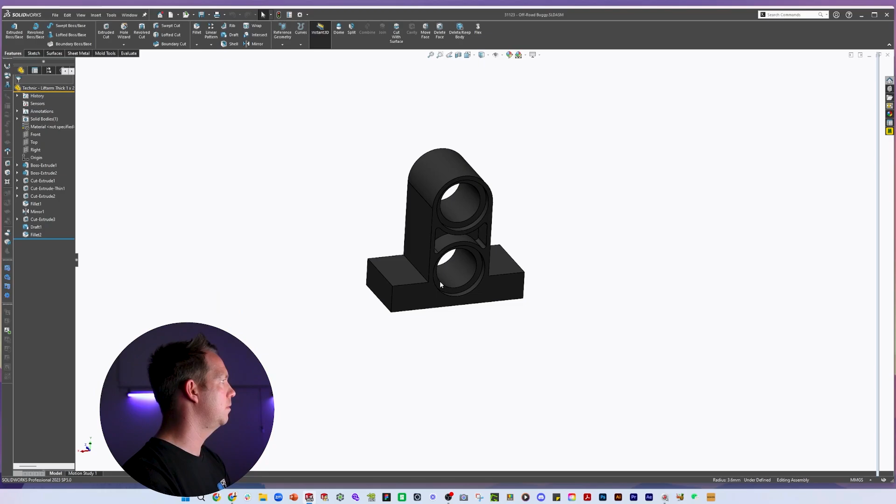What we'll have to do is change this boss extrude to be start sketch plane and go mid plane 7.8. And let's try this again. Not to great success, but I think we can recover what we've got here.

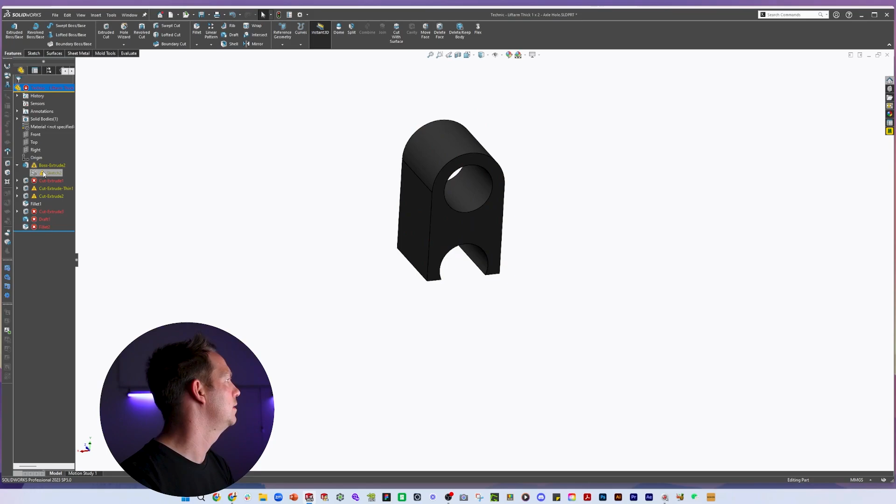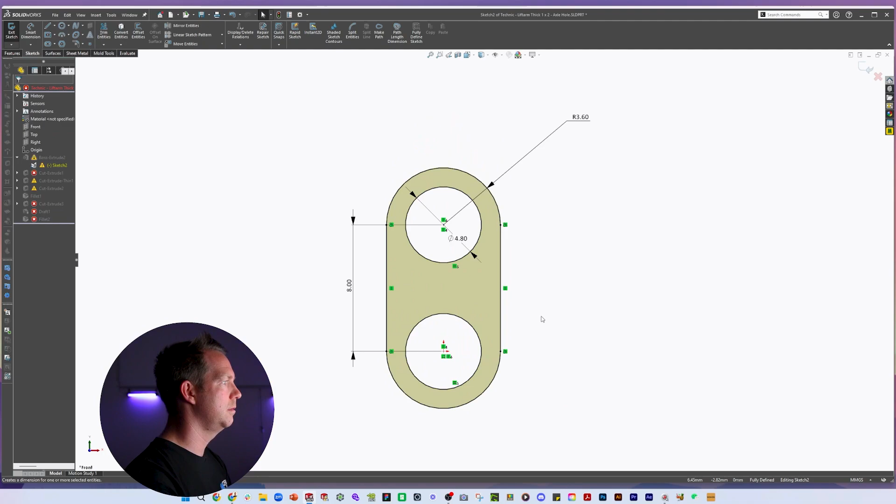We will do that by extending this bit out, removing this, removing these, making this point tangent, this point tangent, this center point coincident, and then changing the height by making this hole here on the origin. Let's see if it's actually got a size of 15.2. It does. Nice. So we don't need to change anything there.

Now I can accept, and then I can see that there's some other next parts that have had issues. One of them is this cut extrude, but we no longer need that separate cut, so we'll just remove that. And then we're up to this cut extrude thin, which was just missing a face.

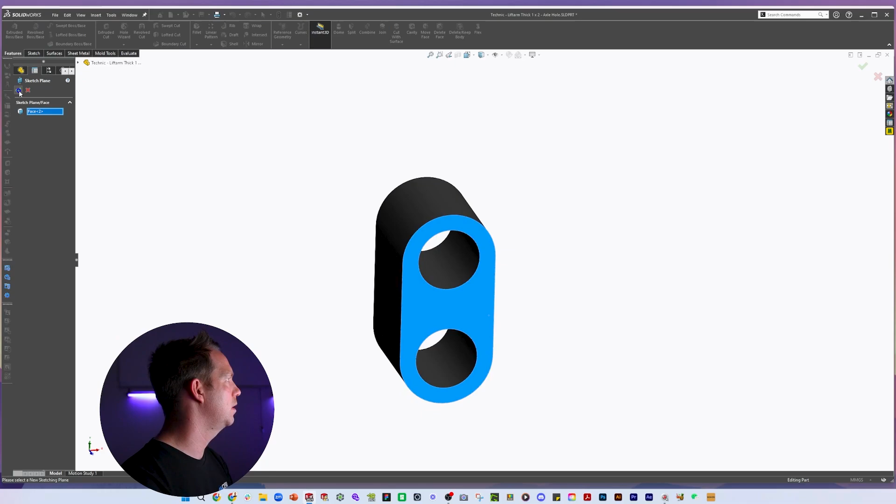However, this part now changes to a circle and, what's it going to call, an axle hole. Right, so we want to go back to the original sketch and we want to change that circle hole to an axle hole.

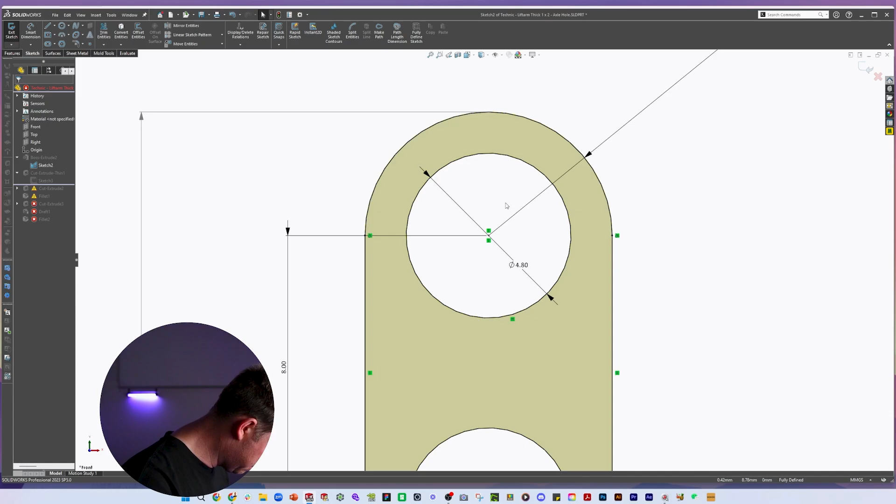So let's do that. Let's get some dimensions. Again, it is pretty small. Measures 4.8, which is right around the same size that the axle is, I think. Let's do the same process we did last time.

So we'll just draw in this side. We will do a circular pattern, change it to this center point. Press OK, just make sure the center point comes back there.

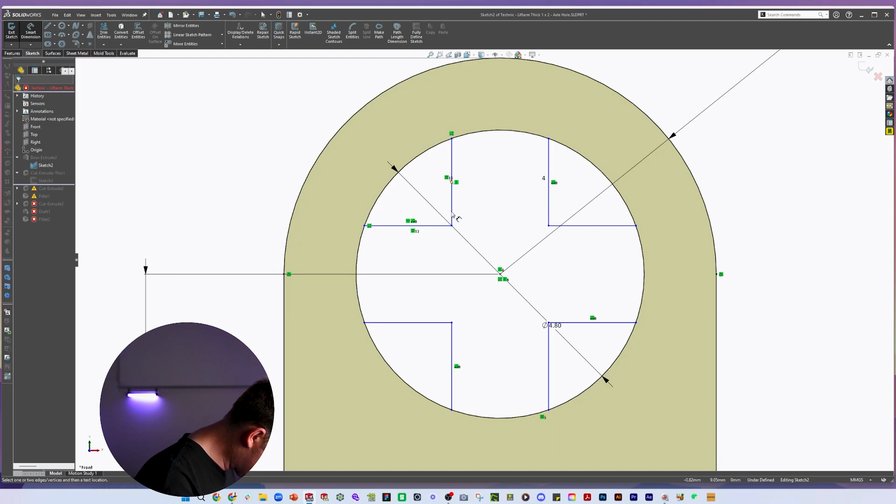Then where it might vary is that I think it looks a little bit wider. Again, it's hard to measure. It's 1.8, I measure. Okay, this time we will trim these sections and I'll make sure that these two remain equal.

Now accept that and we can still see it works, except on the top here we do not need that cut—just on the bottom. All right, that looks better.

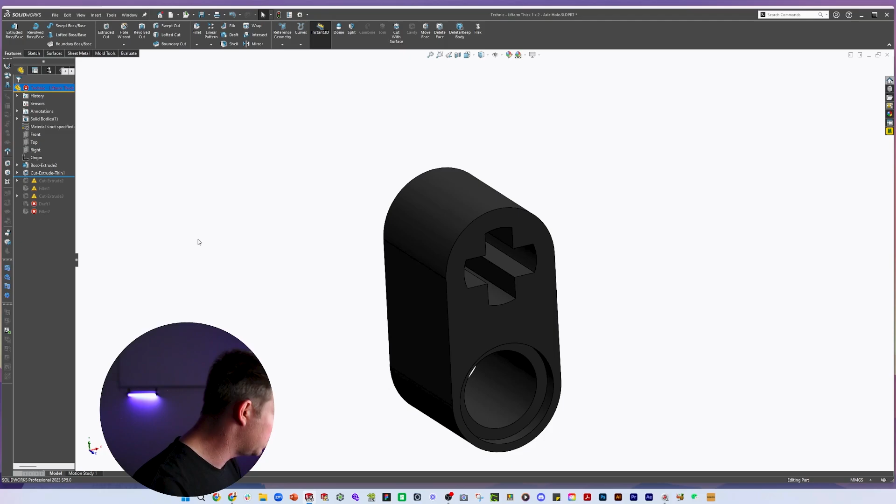Now we do have another through cut that goes all the way through, which is this previous shape. This is all messed up now, so we will edit the sketch plane, edit the sketch, delete everything that's no longer working, which is pretty much everything. Let's just delete it all.

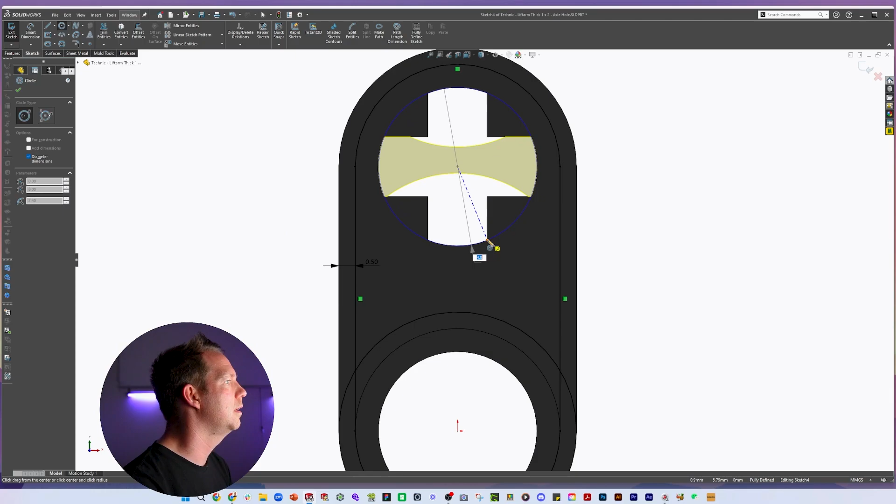We're going to offset that shape and offset this shape, and then whatever would have been here can offset that. The difference is this time that those join up together. I pressed the wrong button.

I just want to go back to the original one and just check this offset dimension. This one, 0.5 everywhere. Yeah, all right, so let's fix this again.

Okay, the sketch remains. What happens is the axle hole is joined up. You can see it here—okay, it goes through the middle.

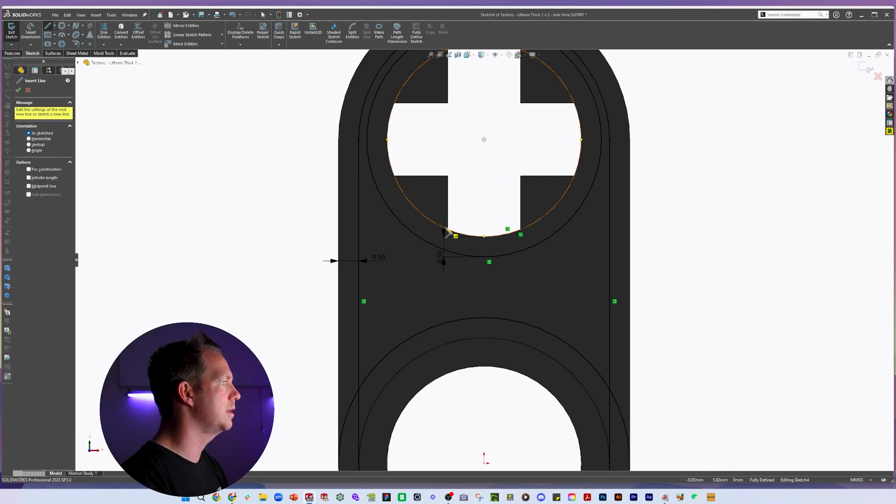So we're going to do the same thing, just within our sketch. Just draw a straight line there, a straight line here. Now there's lots of sketches going on in this, bits that overlap, and we still need to cut it back. Now I'm going to exit the sketch anyway, and back to this part.

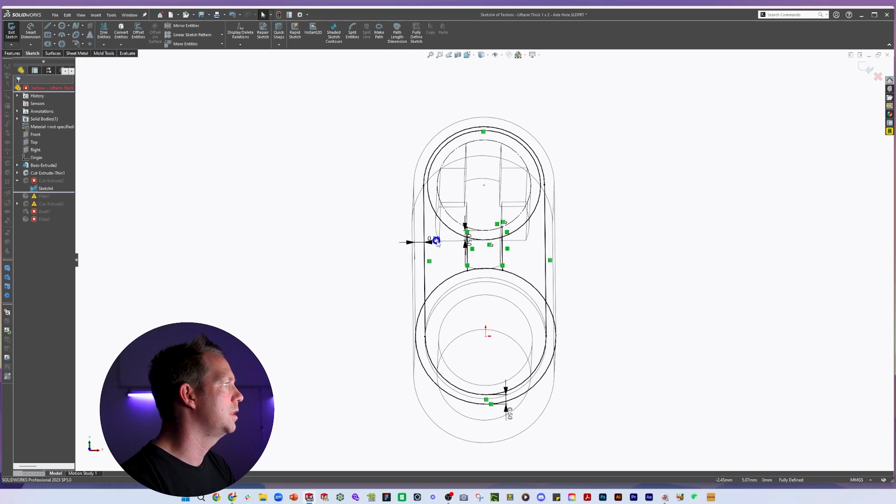I think that this outside wall is not offset enough. I think it's bigger, like that, 0.8. We'll do the same thing here, change that one to 0.8. Okay, and now we get some intersection between them, exit the sketch, and this time I'm going to edit that sketch.

And I'm going to select my contours. I'm going to select inside, inside, inside, inside, like that, and change the direction to through all, and there we have it. Much better. Now there's lots of fillets on those edges, so let's get those done.

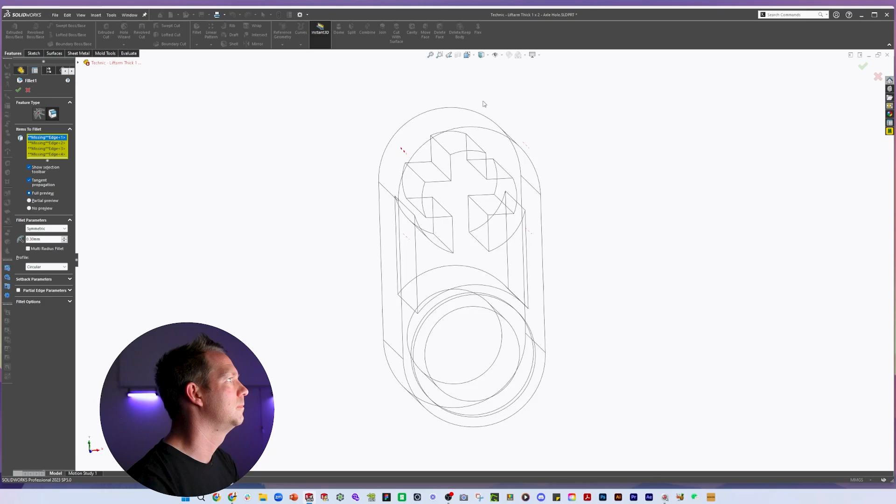Just going to change to this view so I can see them all. I want to do all of those edges. And in this model, they actually look a bit bigger. That could be the case because the part needs extra strength or something similar. All right, and that could be it for the part.

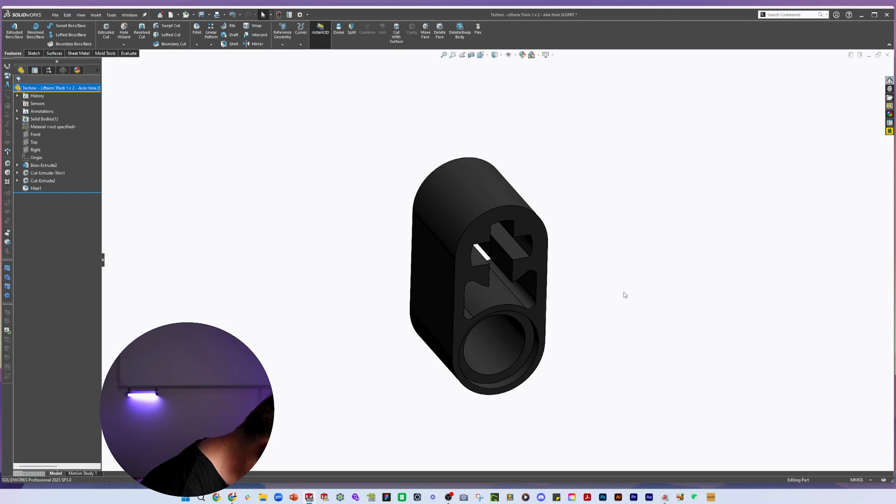We don't have these other details once again, so we can delete all of those and then save the part. Now the only thing I think that is different, I think there are some fillets on this top face. So we'll put those in by doing a select loop, which goes around like this. So right click on the edge, select loop, and make sure it's going all the way around. Press OK. Yes, all right.

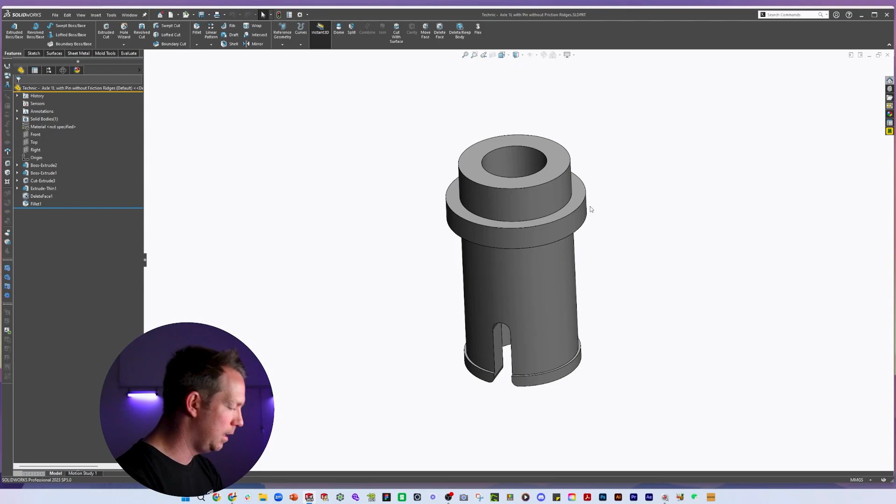So that's one part. The second part is our axle 1L with pin without friction ridges. That part is similar to the one we just created. So I'm going to save a copy of this axle 1L with pin without friction ridges. Cool. And what we're going to do this time, I think I made it in the same place.

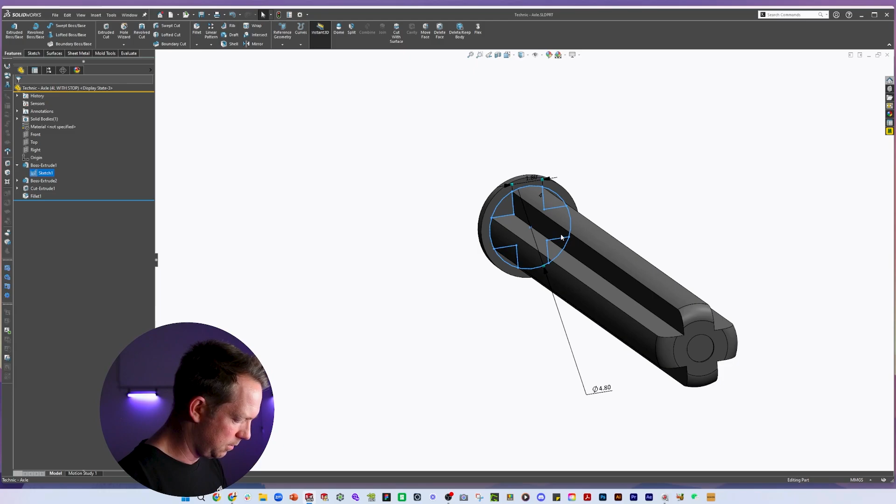From this point on here is where we're going to draw our axle. And our axle, we know, has a dimension of 4 point something. Let's check our actual axle to remember how we did it. 4.8, it might be smaller. It's going to be pretty close. Whether it's 4.8 or 4.6, it might be 4.6. And then 1.8 gaps. Okay.

So 4.6 without shape here. We're making that equal. We're doing a sketch pattern, 4 of them. We bring it - this is always a tricky bit, but to get it fully defined, just grab one of them and drag. Well, it's already on the origin. That's good. Is that 1.8?

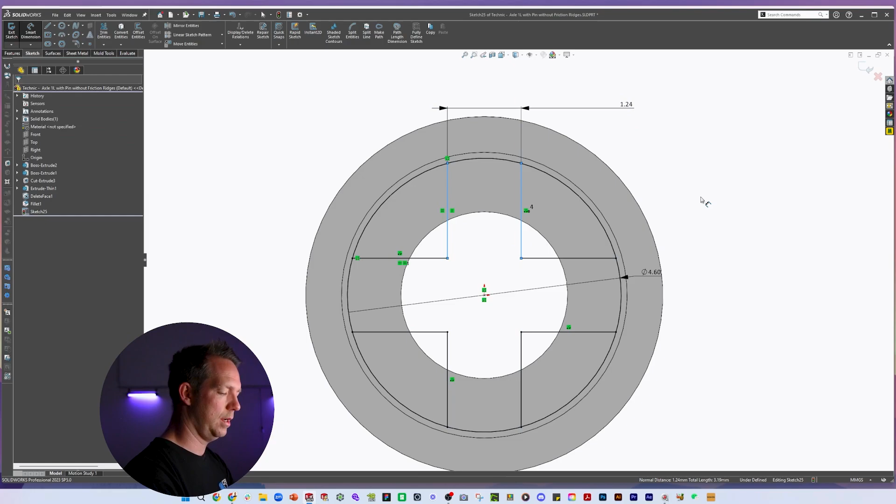And in this example, let's keep the circle there, and we'll do an extrude. Okay, we get the whole shape that we want, and then it is coming out 15.8 from the bottom, which means we change this to 15.8, change it to offset from surface. This one, flip the direction, and press OK.

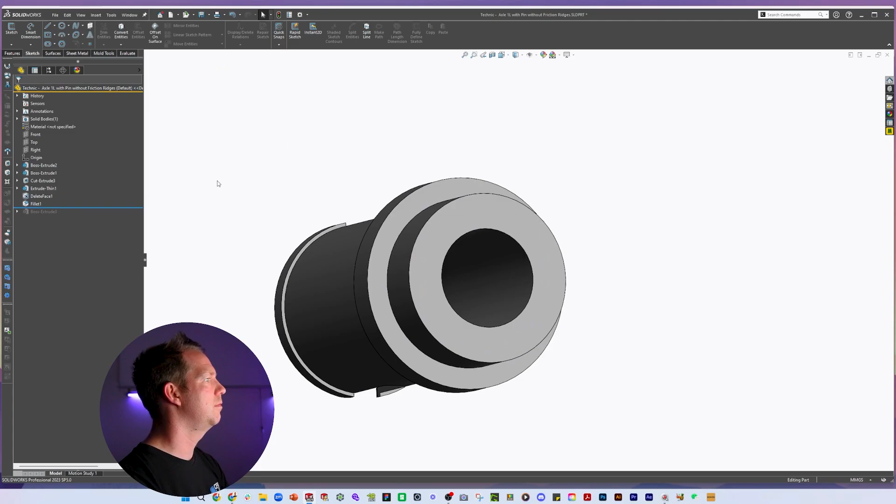Now we don't want this circular bit here anymore, so I'm just going to roll back, and I'm going to cut it off. I'm going to convert, and then do an extruded cut through all, this direction. All right, now that's changed the contour that we need to select here.

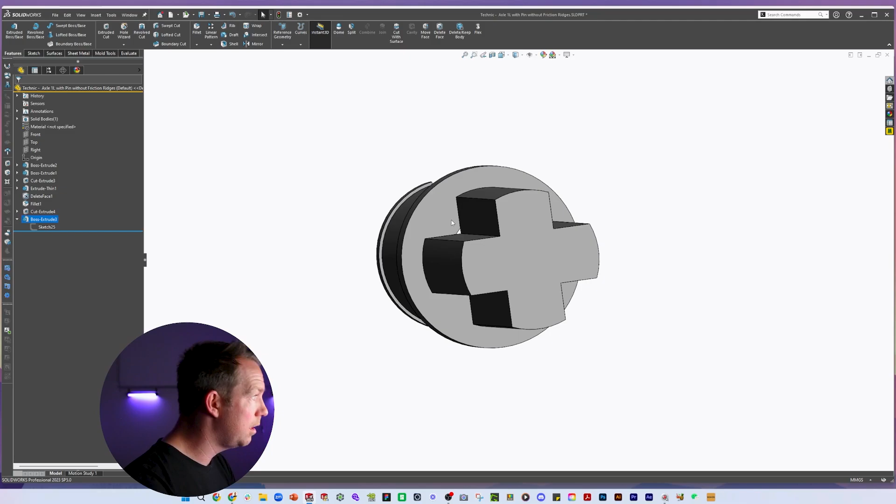So what I will do is go and edit this sketch this time, trim away the circle, so there's no confusion, edit the feature, remove the selected contours, and then we'll do the whole thing. And then all I need to do is actually fill in that section there. So where we've got this cut, I'm just going to do an extrude up to surface, and that filled in those gaps. So now it's like a solid body all the way through.

We did have fillets on that little detail on the end of the axles. 0.8, no ejector pins on these. 0.8, so each all 4 faces.

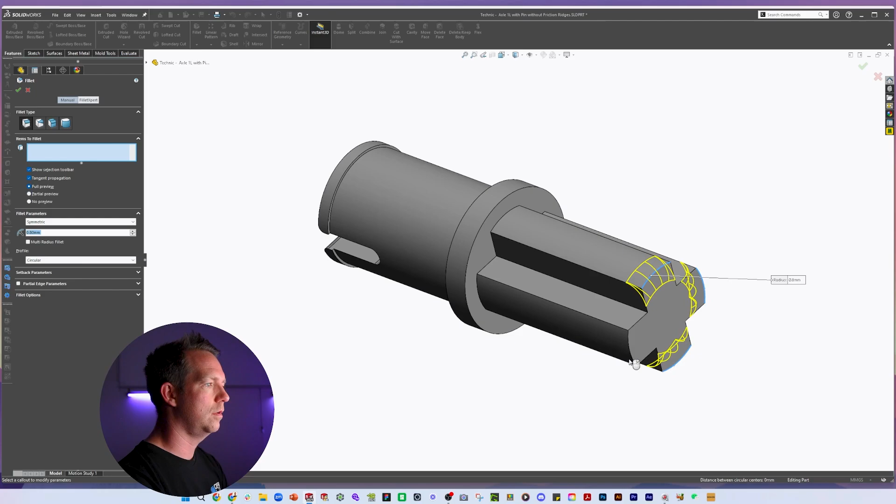Okay, part's done. All right, now the trick, what we're going to do here, adding these parts, we're not going to add them individually to each of these places, 4 places. We're just going to add them to the one subassembly that we've created. There's a couple of ways of doing this.

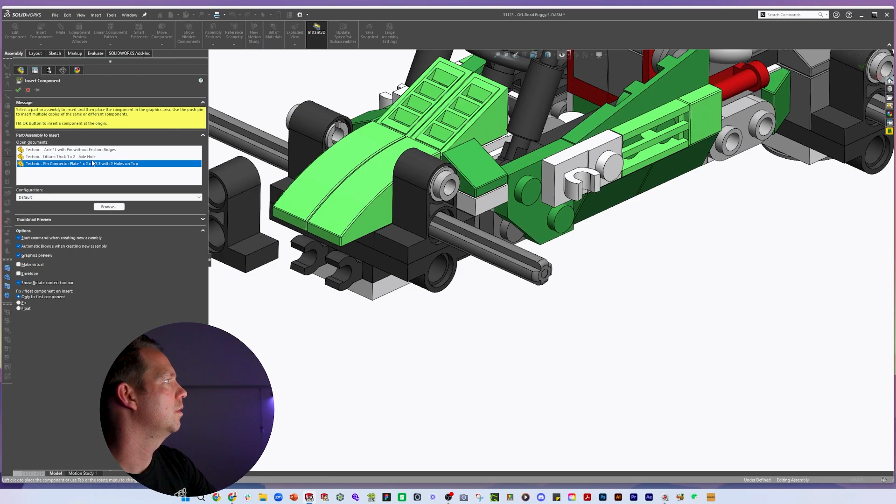Let's have a look at that. So we're going to go insert component, not that one. We're going to add this one. I'm going to add this one. I'm going to add a color to this one as well. It is a sort of light yellow.

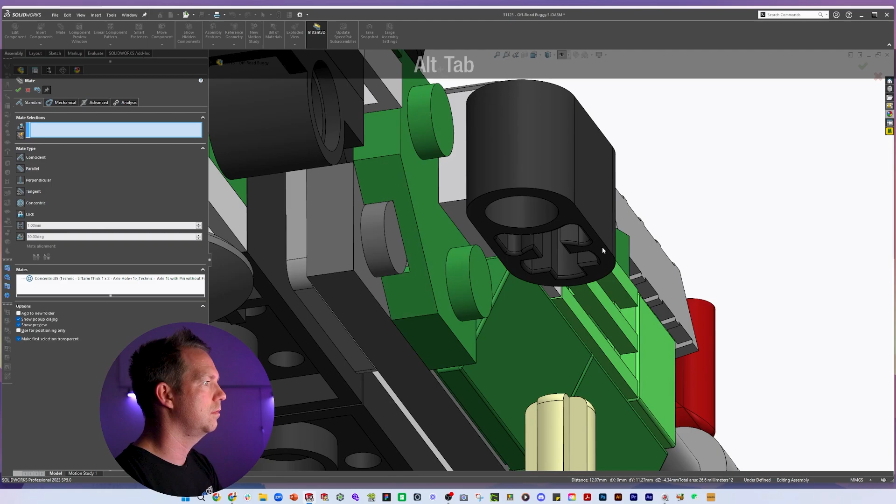And now how they assemble, we put - looks like this one into here. Yeah, that works. And let me just see how they interact. Yeah, the circle stays on the outside, so it's going to mate from that face to that face, and they need to stay aligned.

So that's fine there, and then that goes over the top. This one comes aligned with this one, the other direction, and this one aligns with this one. This is interesting here—we have some dimension issues which we'll have to fix.

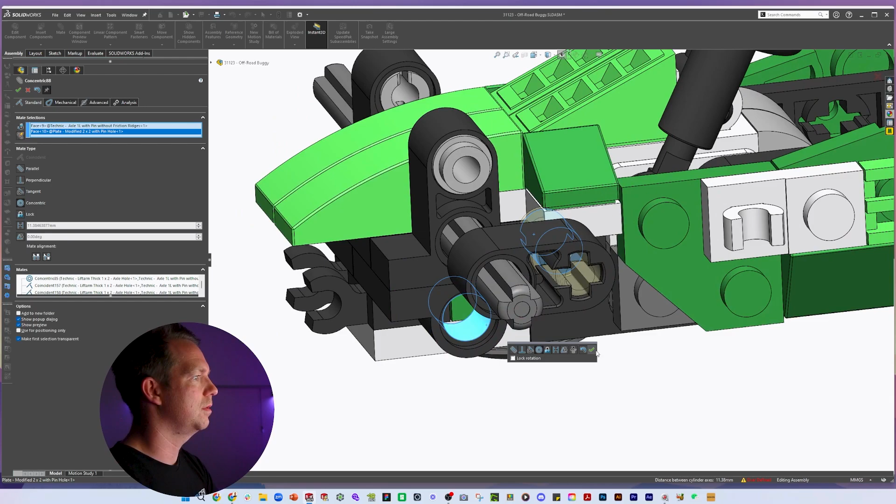Can't add that mate yet. There's something aligned that's not letting it do that. It's okay, bring that down, let's see if we can do it again. Try that one—did that one coincident? No, couldn't do it. It's fine.

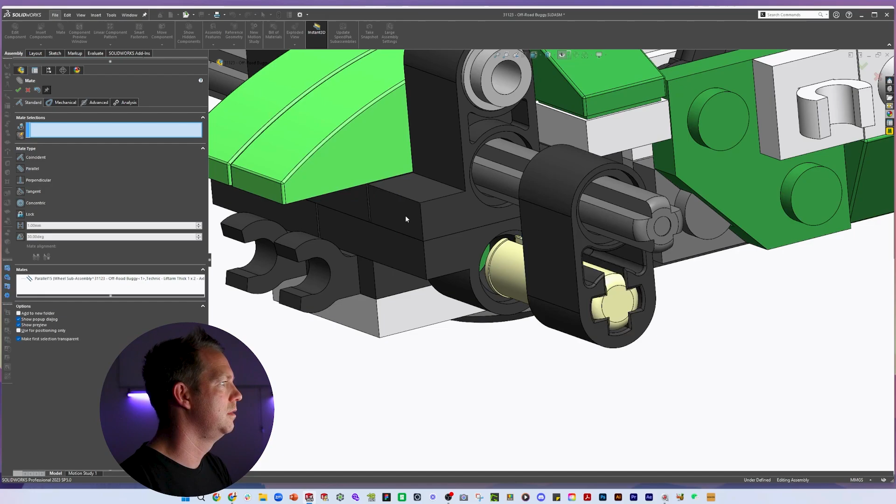Let's get this face and this face at least parallel, and then this face—no, it will be that face onto this one.

Okay, now here's the trick, let's see if this works. That's the subassembly we've mated it to. That is a duplicate—I want to get these two parts in that other assembly.

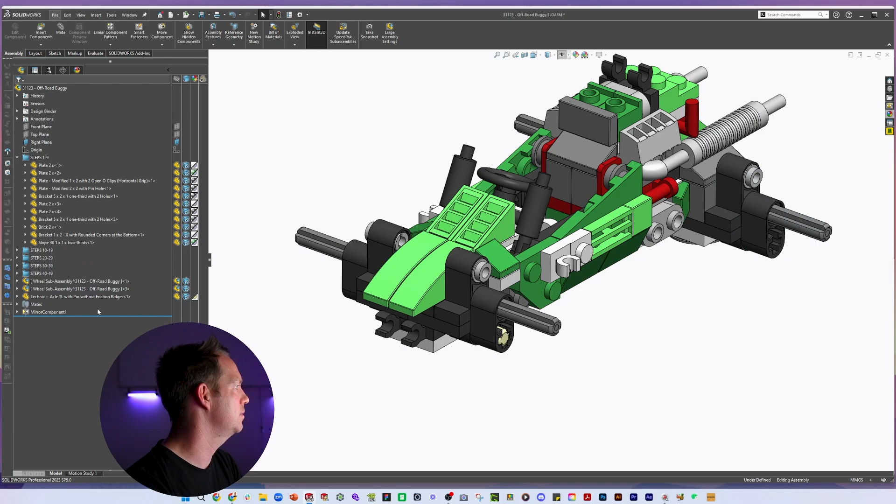I haven't tried this for quite a while, so if it doesn't work first time, we'll come back. I'm going to take it and drag it into this one, and voila, it's added it to the second assembly as well, just like that, all within the context of this subassembly here. And you can see it's added it to the mirrored versions as well.

Cool little trick. Now what we have to do—I'm going to isolate this because we want to identify why I can't mate this with this. So that plate and this subassembly we want to isolate, because we want to get those two concentric.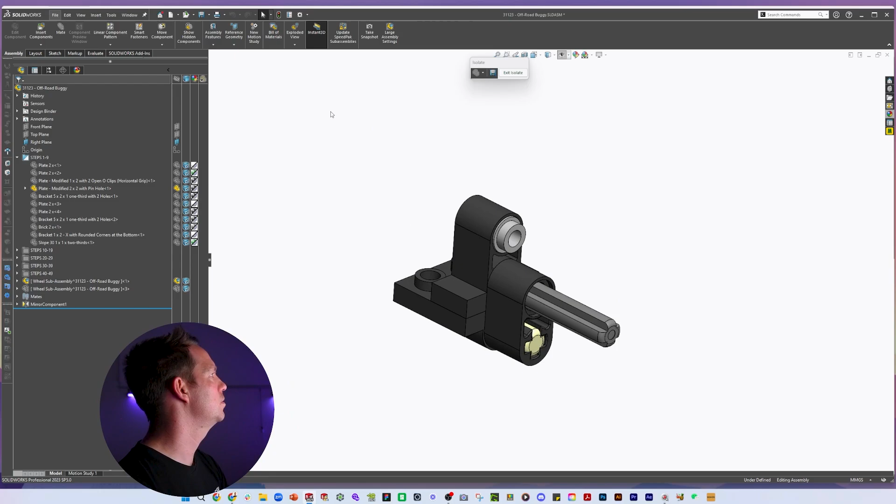Now we're going to use the front plane of that part to do a section view, and we're going to have a look and see what's going on. Here it looks like the center point of this and the center point of this are 0.1 millimeter off. All right, so how can that be?

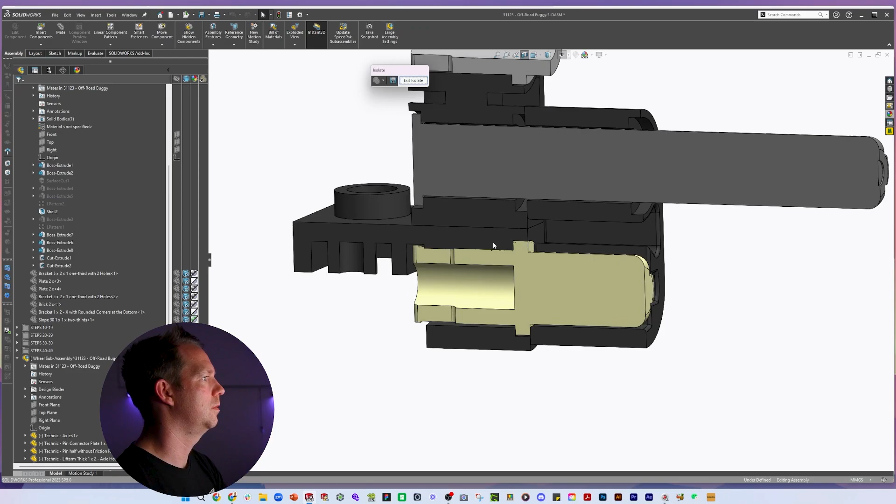This file here, center point of that one to that one, 8 millimeter. If we look at just these two parts together, center point to center point, 8.1. So which one could be more wrong? Well, they should be identical, shouldn't they?

They should be mirrors, but we can see here—I can see the difference already. There to there's 0.9, there to there is 1.1. Now, changing which one's going to have more effect or impact on the rest of the assembly.

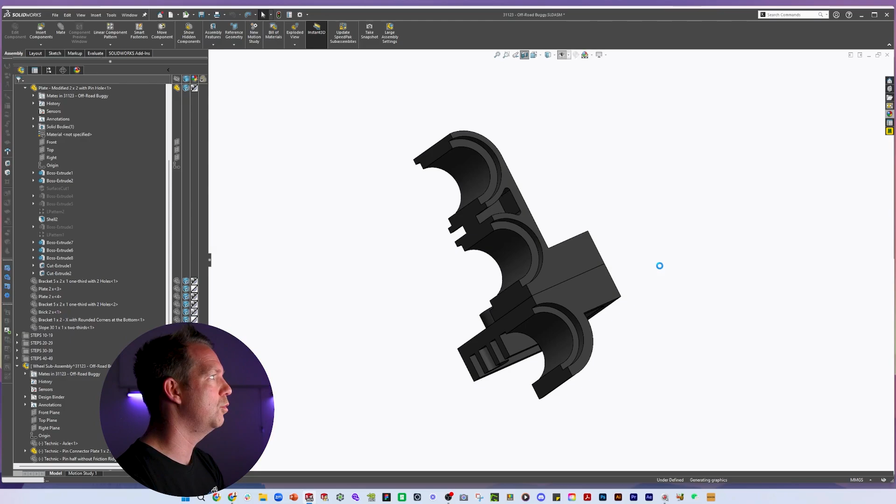These ones are already aligned here. I think it's this one at the bottom—I don't think it's referencing anything else. And so if I open that part and look over here at this, see it's 7.8. That makes sense, doesn't it, that dimension?

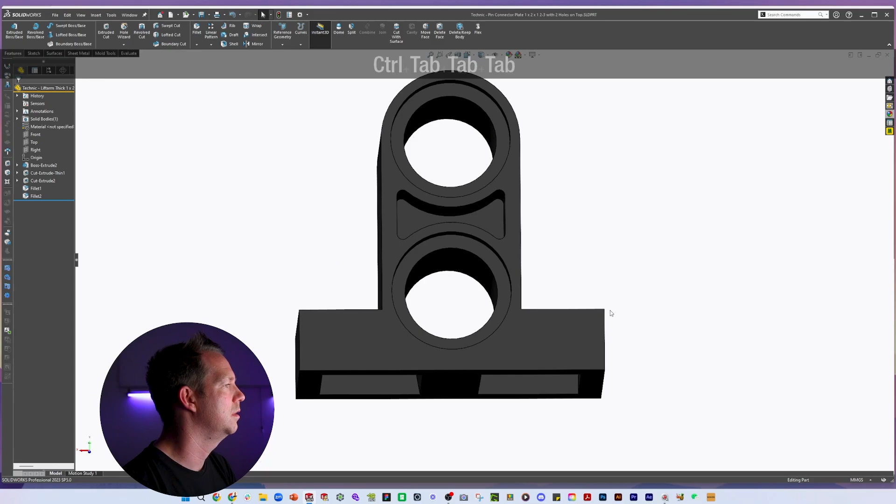That's tangent—making it 7.9 is not going to be a big deal. On this part, no change. On this part, what did we do here for the shape? 15.8. One of them's changing by 0.1 of a millimeter. I think I'll try this one.

Save, close, save, close, close. See if we get any errors. Or did I go the wrong way? I think I went the wrong way—it's now 0.2. Okay, so we went the wrong way.

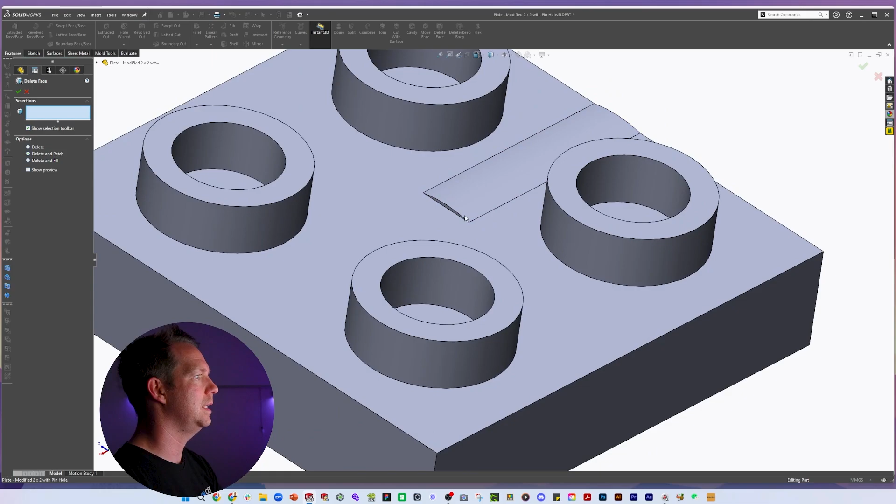I'll change that to 7.7. I get that little bump on the top, however you can very easily delete face to remove that. Close—now it looks like it's going to align perfectly.

Here to here, they look good, and I can't see any other errors or issues, because it's basically the same on each side. So the only other thing I'd say is that I think these two should be the same, but they're not.

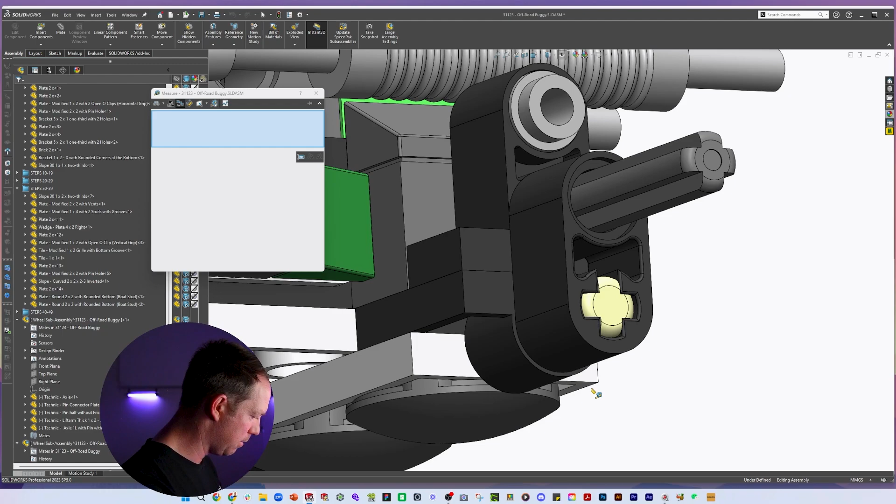All right, so we've just changed some of the dimensions on this—7.2, we've squared off the ends. And now this and this match up. Awesome, all right, that's looking good.